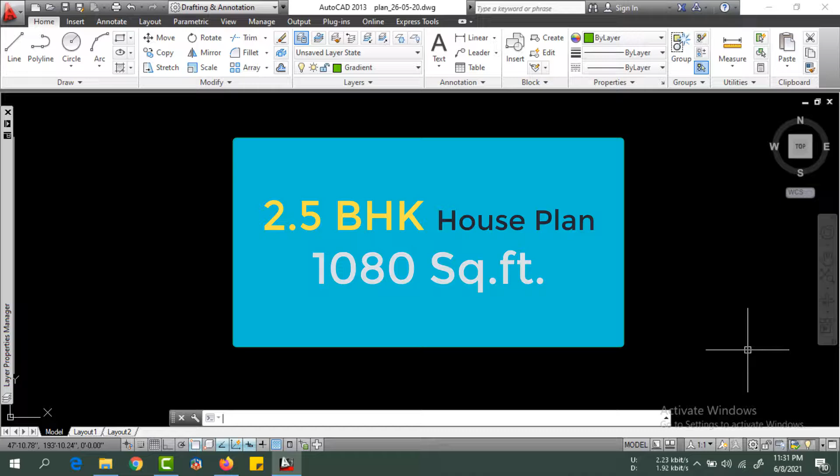In this 2.5 BHK house plan, we have placed 2 bedrooms with a small study or guest room, one hall cum dining room, one kitchen, one common bathroom with toilet and a big veranda.

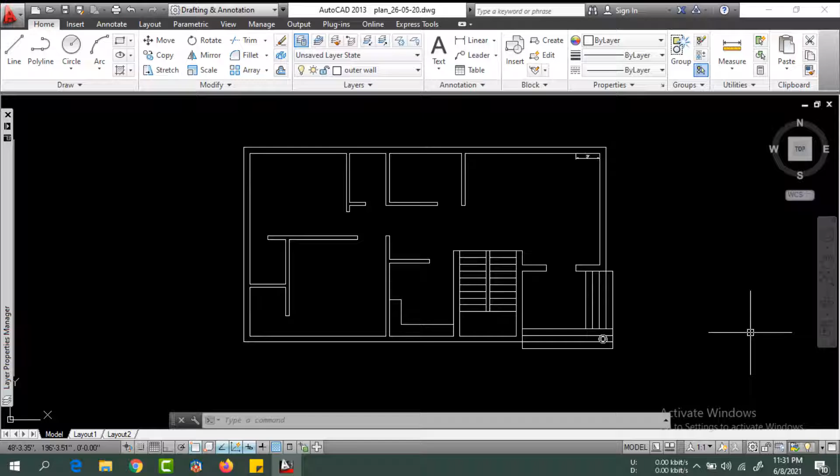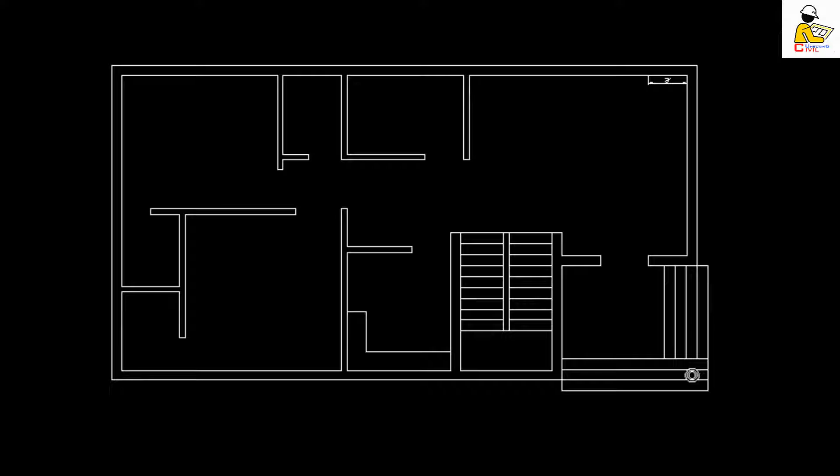This north facing plan is made up within an area of 1080 square feet, having the plot size of 45 feet by 24 feet. In this plan, the outer side wall and stair side wall are having the thickness of 9-inch vertical, and remaining all the internal walls, partition walls are having the thickness of 5-inch.

Now coming to the east location, there is a master bedroom with carpet area of 143 square feet. This room is attached with a toilet of 27 square feet, which is shown in this plan.

And beside this bedroom, another bedroom of 122 square feet carpet area with an attached toilet of 24 square feet area has been planned.

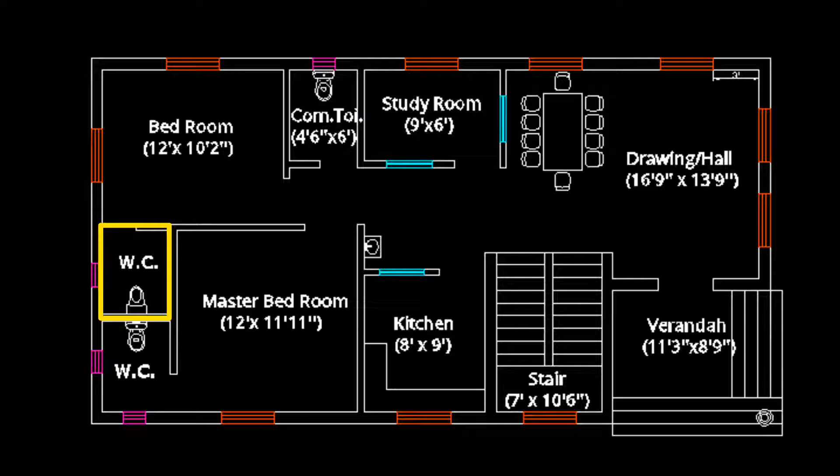Just keep a look in this plan that there has been placed a common bath cum toilet with 27 square feet area just beside the bedroom at south direction.

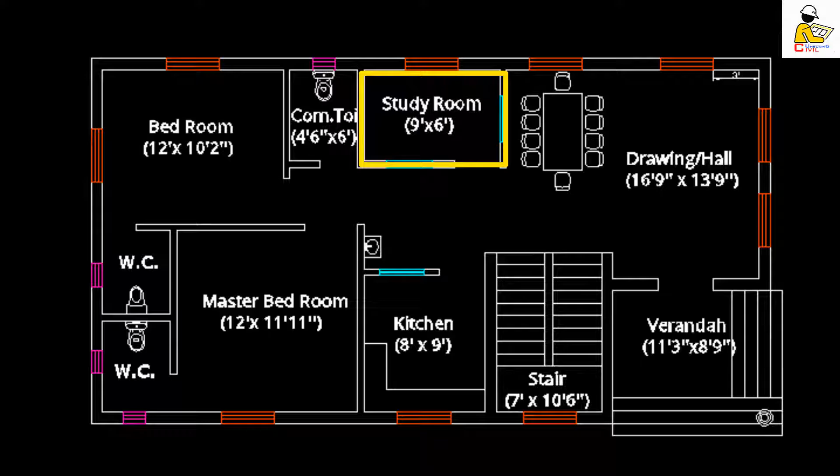Similarly, beside the common bathroom, a small study or guest room has been provided with a carpet area of 54 square feet. You can use it as a puja room or as a separate dining room also.

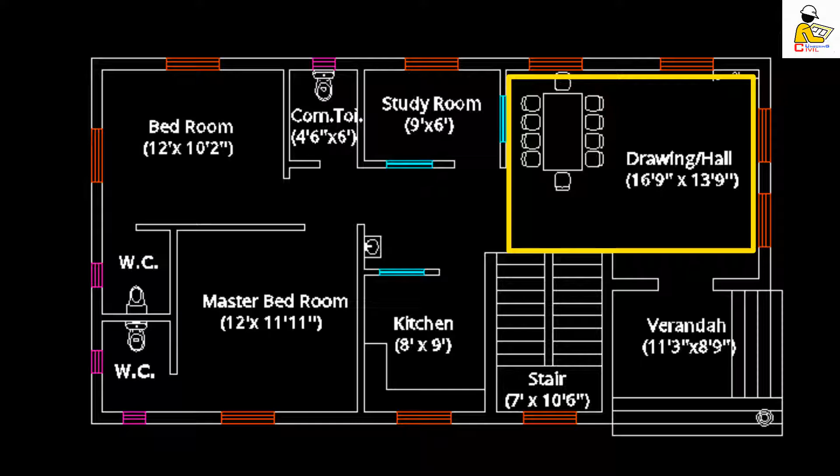Coming to the north middle side, a kitchen room of 72 square feet area is placed, which is quite big and spacious. At the entrance, a big and spacious drawing cum hall room with approx 218 square feet area has been placed. It is freely accessible with kitchen, bedrooms and upstairs.

Just beside the kitchen, a staircase of approx 73 square feet has been placed. This is a simple dog-legged staircase with the size of 3 feet of each tread and 7 feet by 3 feet landing dimension.

Now coming to the proper ventilation aspect, all the bedrooms have 2 numbers of windows of 3 feet span for each room in crosswind direction.

Kitchen is also having a sliding window and wooden window, as well as the internal bedroom walls also have sliding windows. In toilet and common bathroom, there is a ventilator at suitable locations, so that there is enough scope for air circulation and removal of bad foul gas.

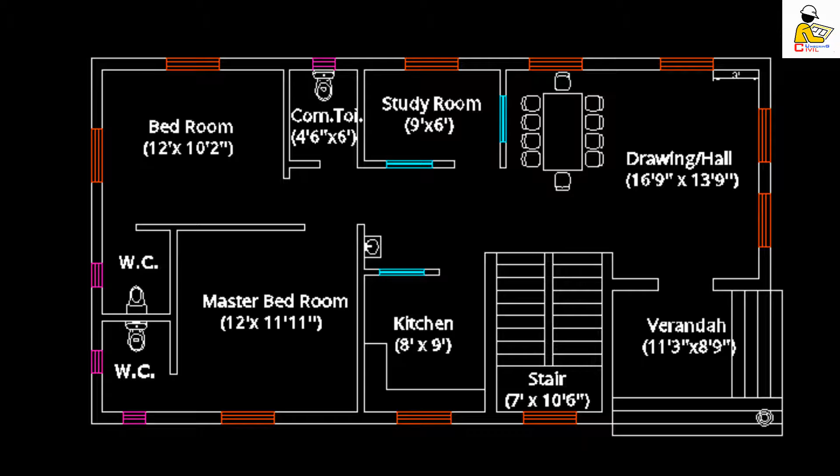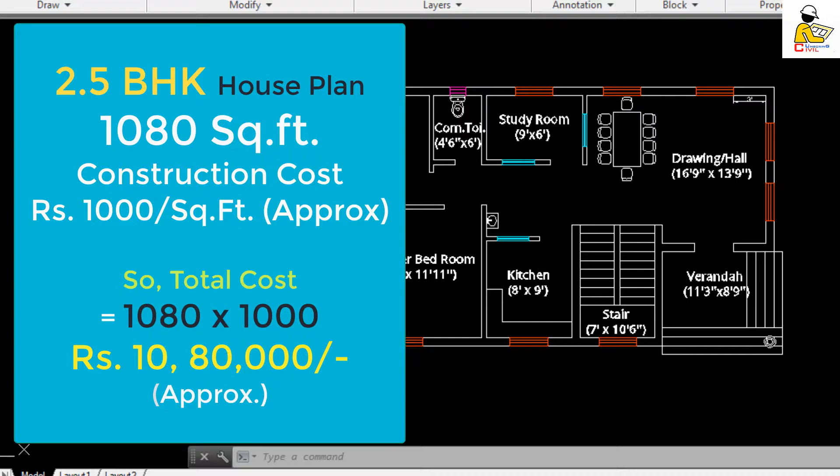Now the main aspect of this plan is to know the approximate construction cost of this house, which is nearly costing about Rs 900 to 1000 per square feet as per general rate considered nowadays. So clearly we can say that the approx cost for this 2.5 BHK house, that is an area of 1080 square feet, is equal to 10,80,000, just considering the construction cost from foundation to first floor only.

So this is it all about simple 2.5 BHK house plan. How you like this, please mention in the comment box.